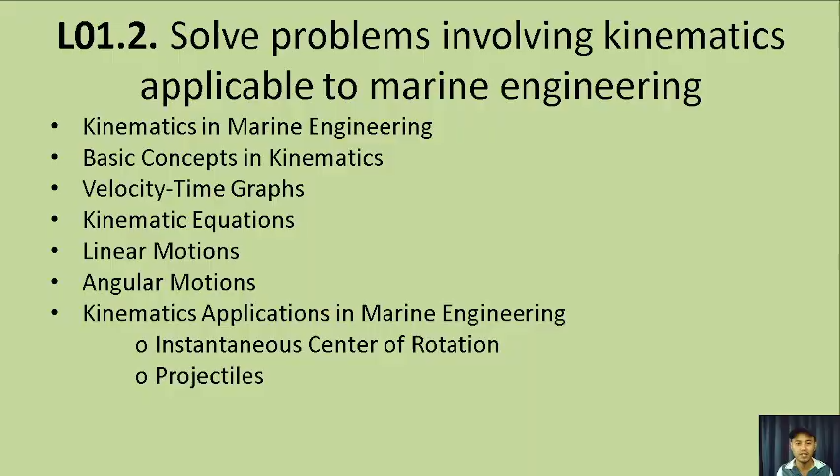Okay, so these are the topics. Let's go. First, kinematics in marine engineering. So linear motion kinematics, piston movement in marine engines. This is the piston, the one going up and down with a rod, that is a piston rod. So that is the one piston movement, the piston moves linearly inside the cylinder, converting combustion energy into mechanical energy, as you can see in the picture or in the slide.

Next, we have the hydraulic cylinder operation. Hydraulic and pneumatic actuators provide linear motion in various auxiliary systems like steering gear, deck machinery, and valve actuation. As you can see here, there is hydraulic oil pushing this part here, the hydraulic cylinder, giving a linear motion in various systems on board ship.

Next, we have the reciprocating pumps. These pumps use linear motion to transfer fluids such as in boiler feed water pumps and bilge pumps. So this fluid is moved here and then goes upward in a linear motion. This fluid here is moved to the other side, this one and that one.

Okay, so this is a gear pump, lobe pump, and a vane pump example. So those are, oh by the way, these are not reciprocating pumps. The reciprocating pumps are those piston type pumps like this one, but they are supplying fluid, not like the engine which is powered by the combustion chamber.

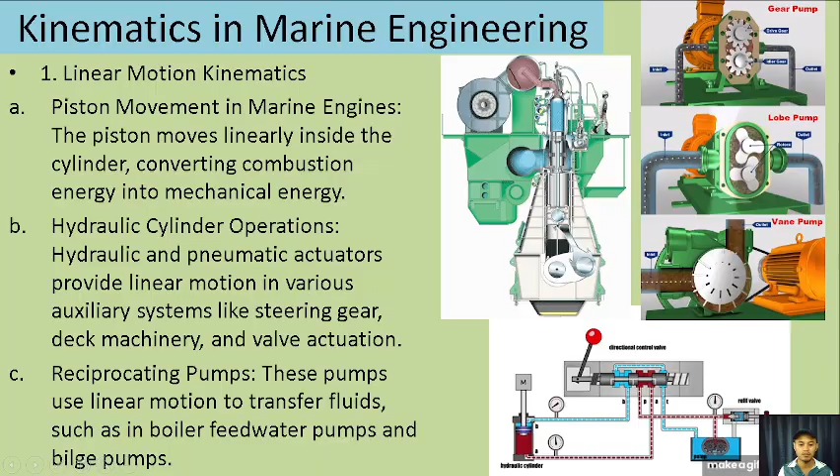So first we have the crankshaft rotation in marine diesel engine. So this is the crankshaft. The linear motion from the piston is converted into rotary motion on the crankshaft. You see, this is the piston going up and down, and then the linear motion of the piston up and down is converted to rotary motion into the crankshaft.

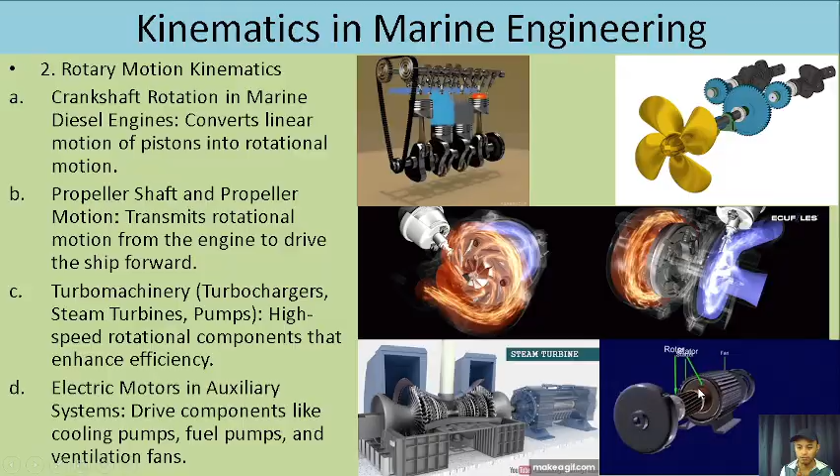Kinematics in marine engineering for oscillatory motion. So oscillatory motion, it goes back and forth in rotation, and when it rotates it strikes something. So valve rocker arm in diesel engine.

So this is the rocker arm. Oh, this is the rocker arm. This is the rocker arm. Is there a rocker arm here?

Okay, so converts camshaft. Ito yung camshaft. It converts rotary motion into oscillatory motion to open and close the inlet and exhaust valve. So pag ikot nitong camshaft, itutulak niya itong ating mga valves. So wala na pala itong rocker arm, diretso na. So naka-overhead cam na siya. Pag ikot itong camshaft, itulak niya itong valve na yan para mag-open, depende kung mag-open siya during the intake stroke or the exhaust stroke.

Okay, another one, steering gear, ram, and rudder movement. The steering gear transmits oscillatory motion to the rudder for maneuvering. So ito, nag-move siya left and right para yung rudder naman sa baba is mag-move din left and right. Pasensya na, hindi yan konektado, parang nagkabilang na yung movement niya, pero hindi kasi yan konektado sa isang magkaiba kasi yung pictures na yan, o GIF na yan.

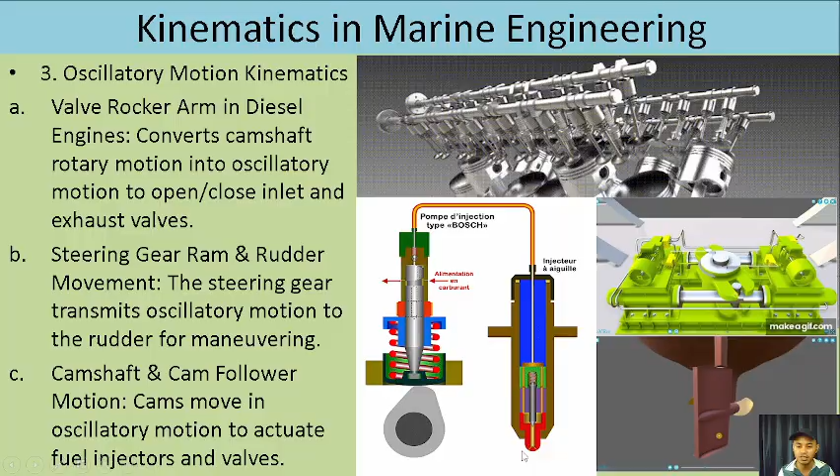Okay, next, letter C, camshaft and cam follower motion. Cams move in oscillatory motion to actuate fuel injectors and valves. So ito yung cam natin, meron siyang ilong, cam nose. Pag angat ng cam nose, iaangat niya itong ating fuel pump, itong pump na Bosch, injection pump. Pag angat ng injection pump, magsusupply naman siya ng fuel papunta sa ating injector para itulak yung injector, magbubukas siya, and then magsispray doon sa loob ng engine para magkaroon ng combustion. So that's how it works.

Next, we'll go with the complex mechanism, the combination of motions. Okay, so first, letter A, we have the crosshead mechanism. These are examples lamang. So asan yung crosshead? Ito, this is the crosshead. Up, down, up, down. The crosshead links the reciprocating motion of the piston, yung piston na sa taas, and the rotary motion of the crankshaft sa baba. So yung nagko-connecta ng reciprocating at ng rotary motion is the crosshead. Siya yung nagkakaroon dyan yung ating complex mechanism, the combination of more of motions.

Okay, letter B, gear trains and reduction gear used in turbochargers and propulsion systems to manage speed and torque. Ano ba yung turbocharger? Wala dito turbocharger, iba kasi ito exhaust gas recirculation. So yung exhaust gas natin, na linear ang motion, mababangga siya doon sa ating turbocharger, so magka-create siya ng rotation na rotary motion. Same din sa propulsion system natin, so yung from the piston, from the engine na reciprocating, nagkakaroon ng linear motion papunta sa ating propulsion, sa propeller.

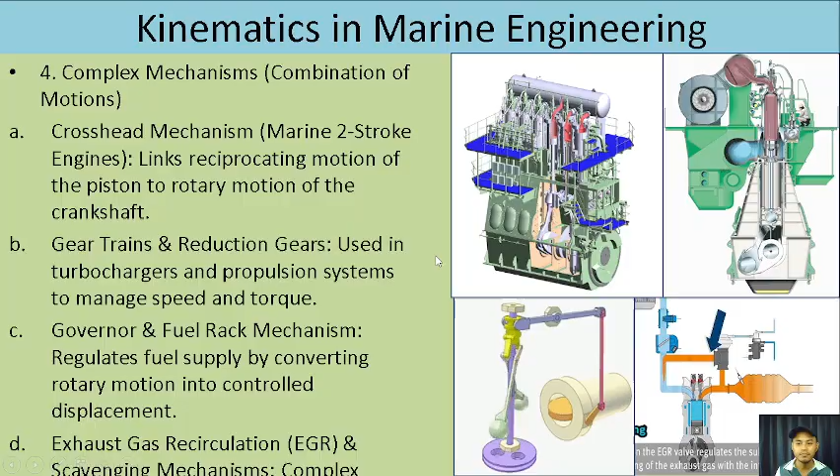Okay, next we have the exhaust gas recirculation and scavenging mechanism. Ito yun, so yung exhaust gas mo is dadaan dyan, papunta doon sa funnel. Pero yung ibang part ng exhaust gas is binabalik natin dito para ma-lessen natin yung pollutants na lumalabas sa ating exhaust gas system. So these also use complex mechanisms.

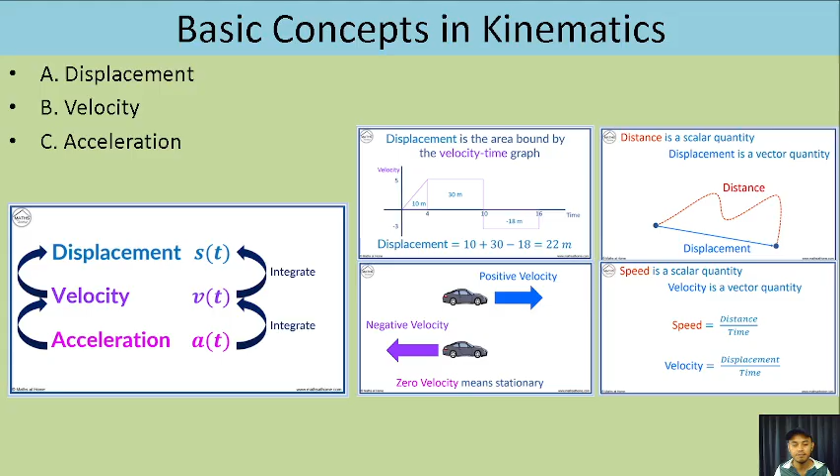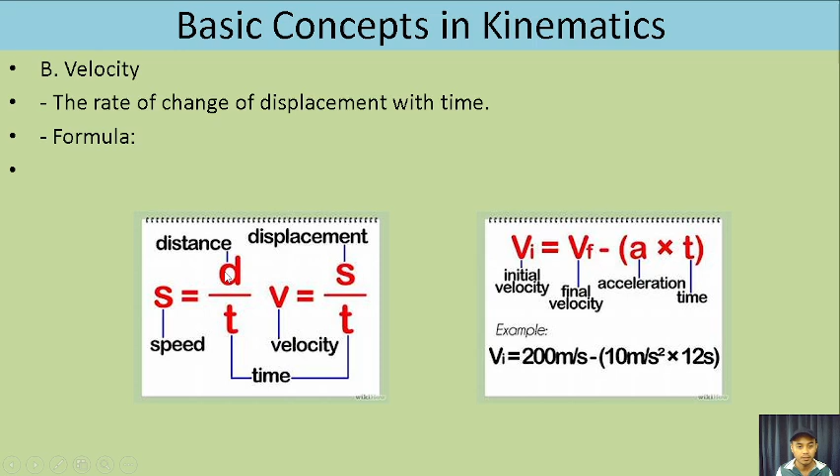Okay, so let's go with the basic concepts in kinematics. So we have A, displacement, which is the area bound by the velocity time graph. We have the velocity, which is the movement. Acceleration, yung bilis ng pagtaas ng kanyang velocity. Okay, so using the formula, velocity is the rate of change of displacement with time.

So ibig sabihin, walang nadadagdag sa acceleration mo. Maintain mo lang yung velocity mo over time.

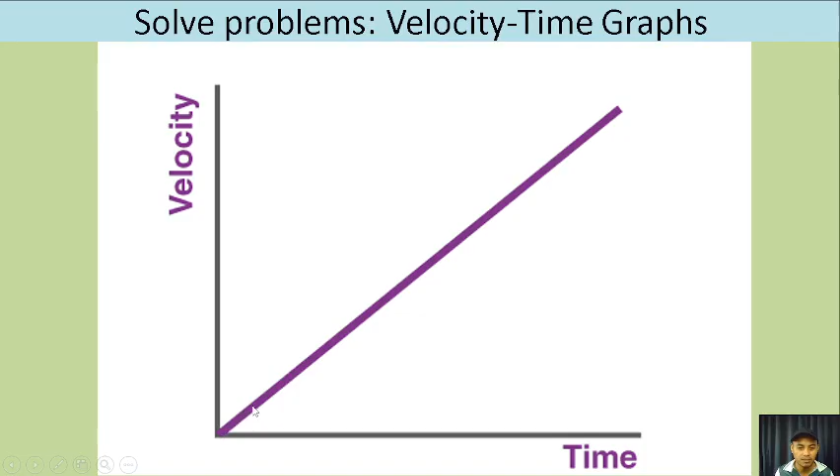Next, we have here the velocity and time. So habang tumataas yung velocity, habang tumatagal, lalong na-maintain mo lang ang pagtaas ng velocity mo. Ibig sabihin nito, this is a constant acceleration. Ni-maintain mo yung pagtaas ng velocity mo.

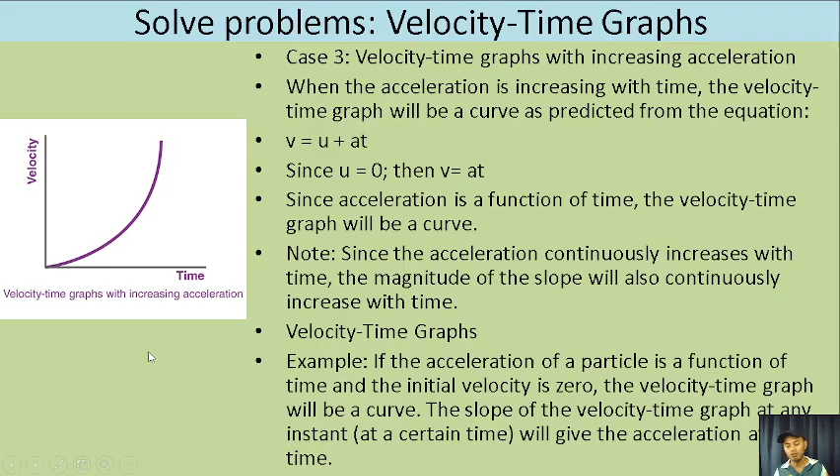Constant lang yung acceleration mo over time. Okay, and the last we have here, habang tumatagal, lalong bumibilis yung velocity mo. Ano ibig sabihin nito? This graph tells us that this is an increasing acceleration. Habang tumatagal, lalong bumibilis yung velocity mo. Nag-i-increase yung acceleration mo, lalong bumibilis yung takbo mo. Okay, so those are three different types of velocity time graphs.

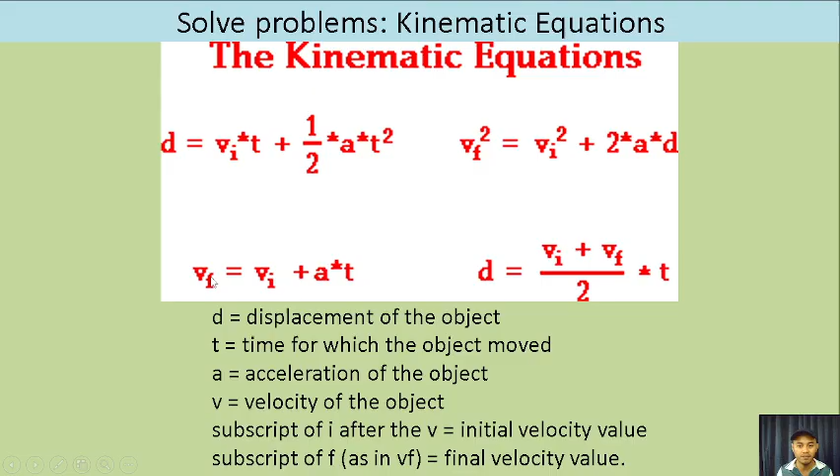Okay, we have here kinematic equations. Discuss natin ito. D is for displacement of the object. Time for which the object move is t. And A is for acceleration, V for velocity, and then we have here initial, like for example, the VI is initial velocity, and the VF is final velocity. So meron siyang subscript.

So a cargo ship, this is an example problem. A cargo ship will cruise through calm waters from port. The ship starts from rest. The captain orders the engines to accelerate uniformly at 0.5 meter per second squared for 30 seconds to avoid a potential collision. Solve the following: What is the ship's velocity after 30 seconds? How far does the ship travel during this time? If the ship needs to cover a total distance of 1,000 meters, how long will it take at this acceleration? What is the ship's velocity when it has traveled 1,000 meters?

So these are the formulas. First, given natin is initial velocity. We have the acceleration and the time. So the first question is, what is the ship's velocity after 30 seconds? By using the formula, final velocity equals initial velocity plus at. So makuha natin yung velocity, 30 meter per second.

Next, how far does the ship travel during this time? Using this formula, we can get that the ship can travel 675 meters during this time for 30 seconds.

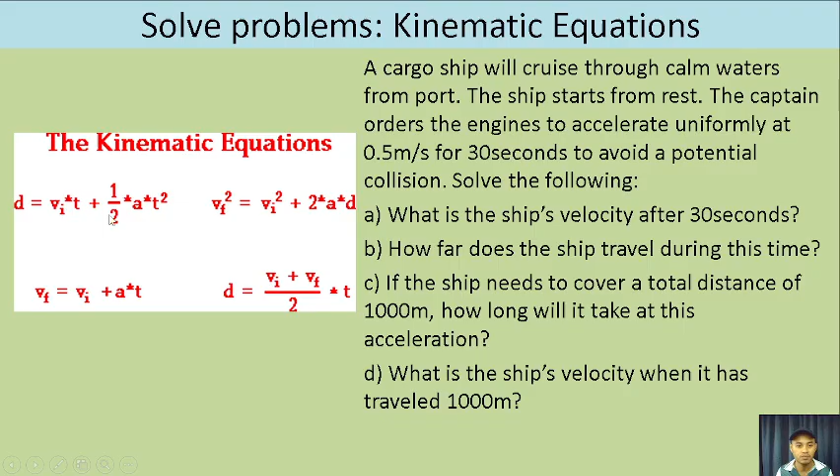And then if the ship needs to cover a total distance of 1,000 meters, how long will it take at this acceleration? Using this formula, distance, so magkaiba pala yung letters na ginamit dito, pasensya na. Distance equals initial velocity times time plus 1/2 AT squared. Saan ba to? So 1/2 AT squared, ito yon. D is equal to VIT plus 1/2 AT squared. Using that formula, makukuha natin yung answer is 40 seconds.

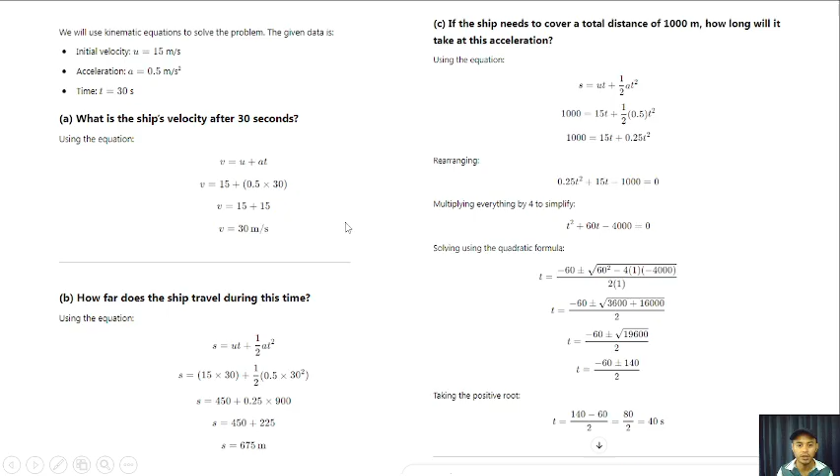Okay, and lastly, what is the ship's velocity when it has traveled 1,000 meters? We can use the formula here: VF squared equals VI squared plus 2AD. So para makuha mo yan, square root mo, and then yung answer mo is 35 meter per second.

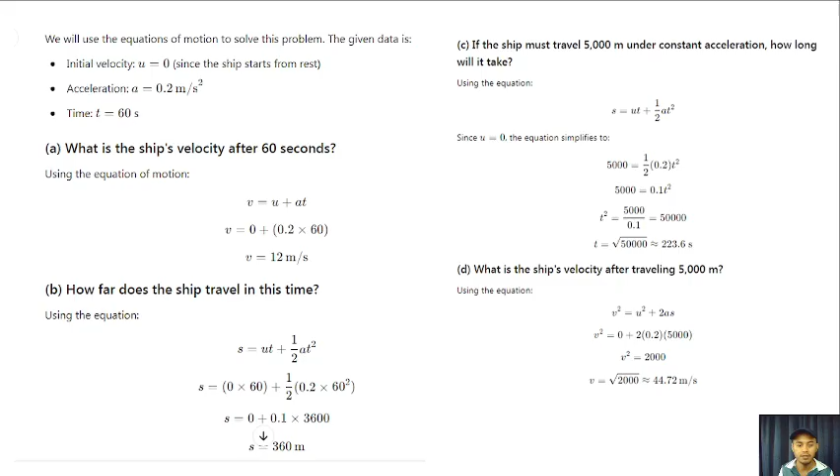Okay, and so there are some problem solving also. Let's go na lang. So that's another example.

Next, we'll go to angular motions, or W. Parang W siya, pero hindi siya W. Ang tawag dyan, omega. So a ship's propeller is initially at rest and begins to rotate uniformly under the influence of the engine's torque. The angular acceleration of the propeller is 0.1 rad per second squared. After 50 seconds, the propeller reaches a certain angular velocity. The engineer is tasked with determining the propeller's rotational performance. Solve the following, so here's the formula.

To solve that, we can use this formula. Angular velocity after 50 seconds is equal to initial angular velocity plus angular acceleration times time. So we have here 5 rad per second.

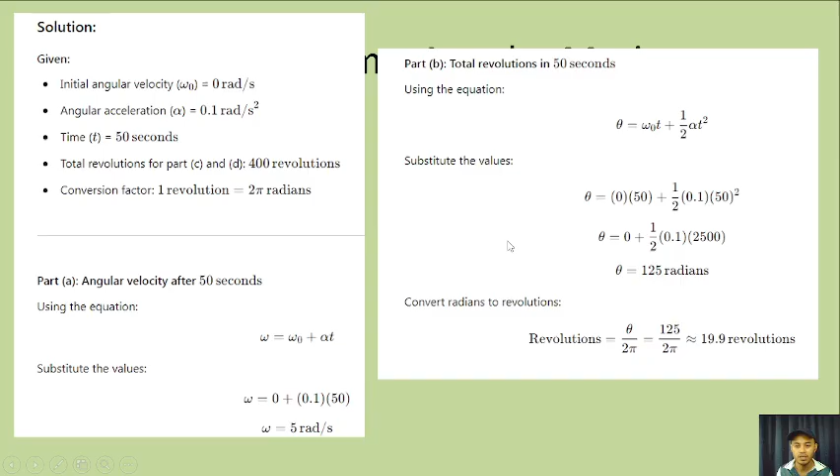For letter B, the total revolution will be in 50 seconds. How many revolutions does the propeller complete during this time? Using this formula, theta equals initial angular velocity times time plus 1/2 AT squared. So makukuha natin yan, this is 125 radians. And then using the formula of theta radian, revolution equals theta over 2 pi, makukuha natin ito, 19.9 revolutions.

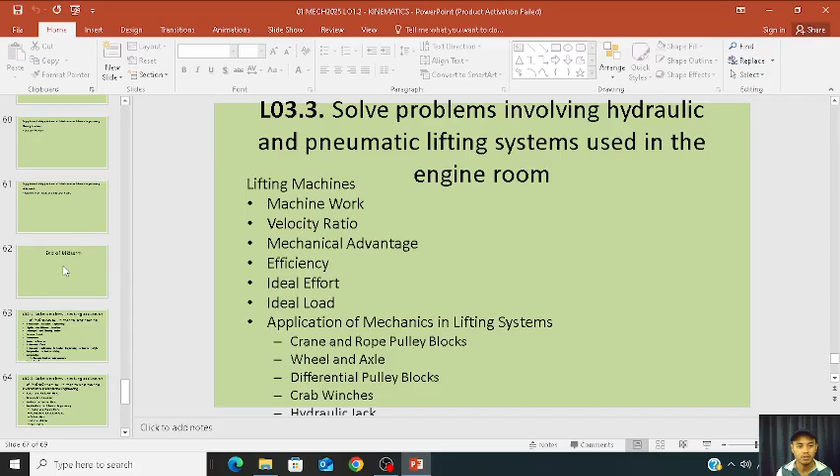Okay, so yun lang. That ends our presentation. So those are examples of computations natin dun sa velocity, acceleration, linear velocity, and angular velocity. So I hope you learned something today, and see you on our next video.